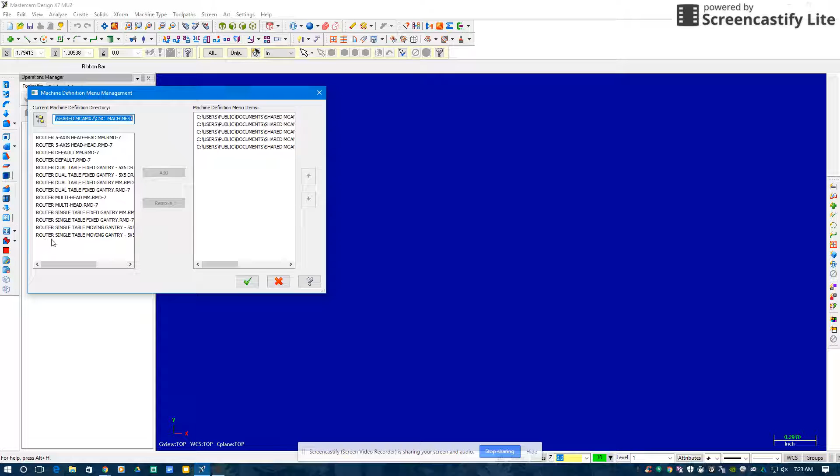Okay, first thing I do is I open up Mastercam X7. When I have it open, I go up here to Machine Type, Router, then I go to Manage List, and I go down here to Techno Servo, and I pull it over and add it here. Then when I'm done doing that, it should be on there.

So this needs to say Router, Techno Servo. I click here to Property Manager, Stock Setup. I put my arrow in the lower left-hand corner on the top of the board, and then I put my dimensions of my board in here. So in the X direction, I'm 14.5. In the Y direction, I'm 11. 3/4 thick.

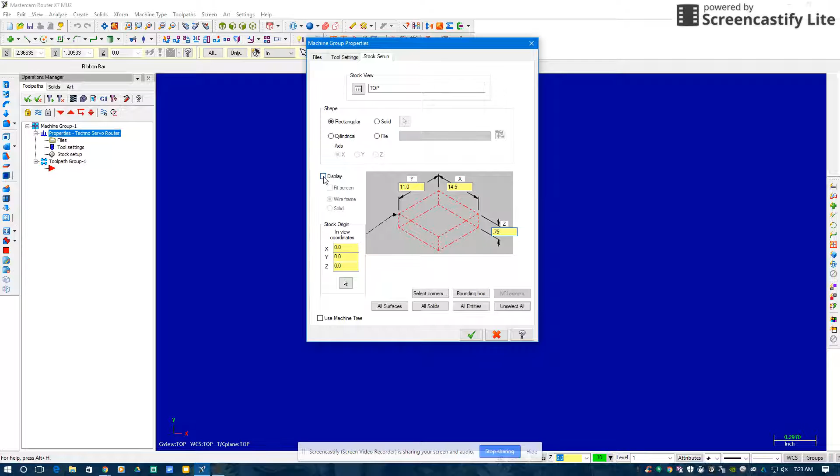If I want to see where that is, I click Display, then green check mark. F9 on my keyboard fits it to screen.

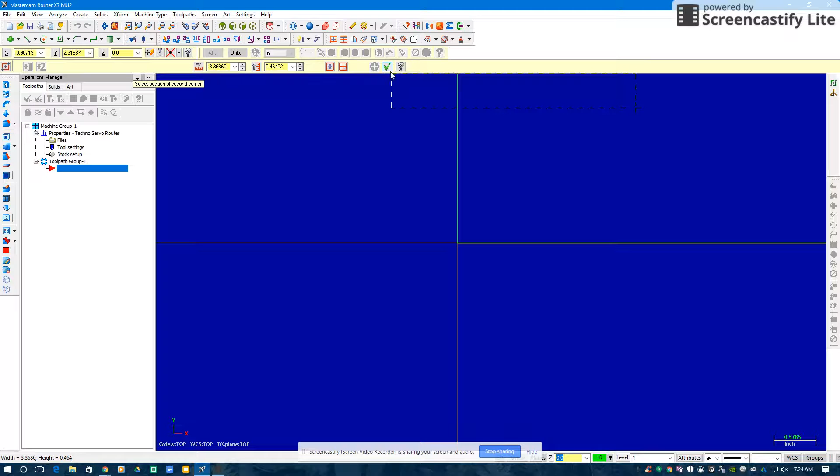From there I'm going to go Create a Rectangle. I click at the origin, I draw into the first quadrant, and I'm going to go over the same dimensions that I entered, so over 14.5. I'm going to go up 11, and I click in the first quadrant, green check mark, I'm done. This little thing fits it to screen.

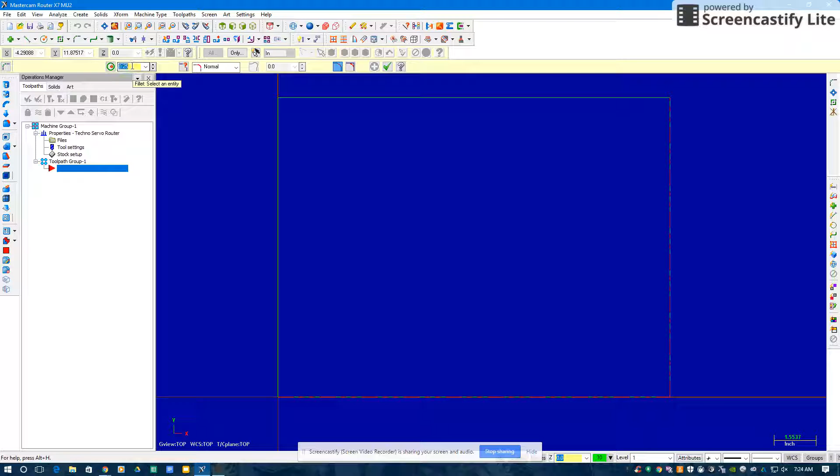Next thing I do is fillet the corners. I need to keep track of what the tape was or whatever I used to draw that radius. I have a 2-inch radius, so this right here is a fillet. I'm going to set that radius to 2 inches. I click here and here, here, so all of them are filleted. Green check mark, I'm done the operation.

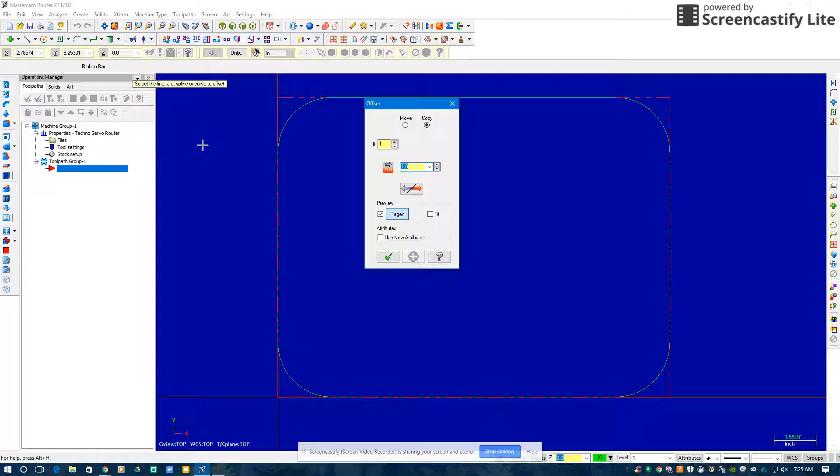Now I'm going to go X-form offset, and I'm going to use a 1/4-inch ball end mill to cut my blood groove, and I think offset 1 inch. You can bring it in however much you want, but remember you're going to go down the center line. So 1 inch is good.

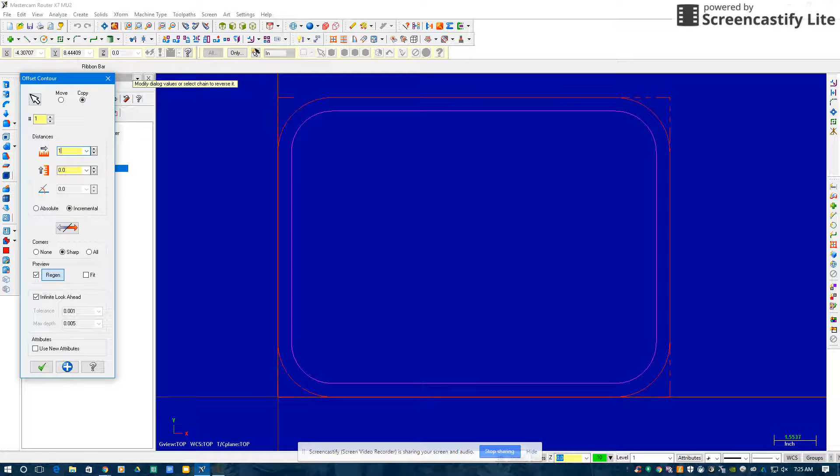I'm going to go X-form, offset contour. I'm going to select a chain. I'm done selecting, and I'm going to offset it 1 inch, and it's going to be a copy. So this is going to be my blood groove. If I'm going to have a hole cut in it, it's going to look a little different. Okay, this just makes my colors more clear.

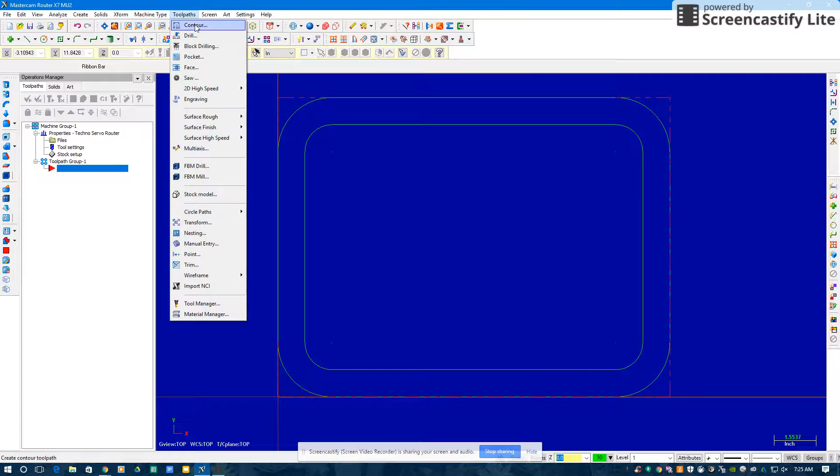Now my geometry is fully created, and now I'm going to run a toolpath on there. So I go toolpath, contour, green check mark. This is a chain, I'm going to chain it all the way around, green check mark. The tool I'm going to use, I come down here to tool library. It's going to be a 1/4-inch ball end mill.

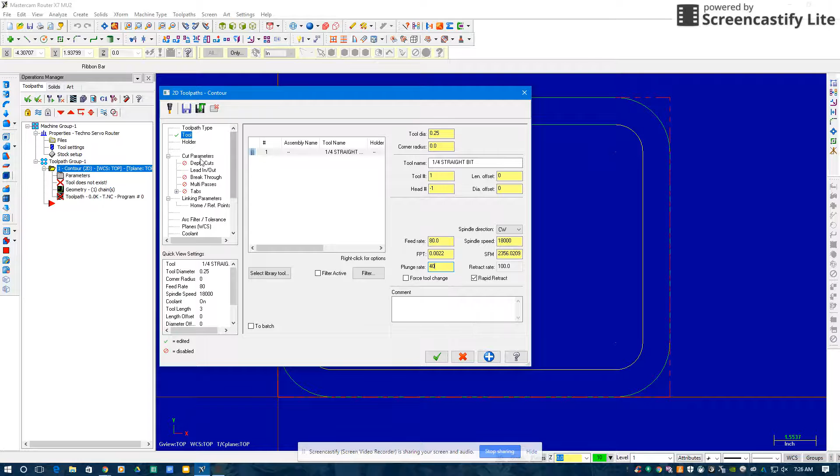I'm going to set this feed rate at 80 and this plunge rate at 40. Work my way down here, holder, cut parameters. I'm going to take the compensation type and turn it off. Depth of cut, I always select this. Lead in, lead out, I'm going to deselect that. Breakthrough, multi-passes, tabs, linking parameters.

These are all absolute, and this is how deep you want that cutter to go in here, so it's a negative value. I'm going to go negative 0.15. Blue plus holds the setting, and then green check mark. And now I've toolpathed that.

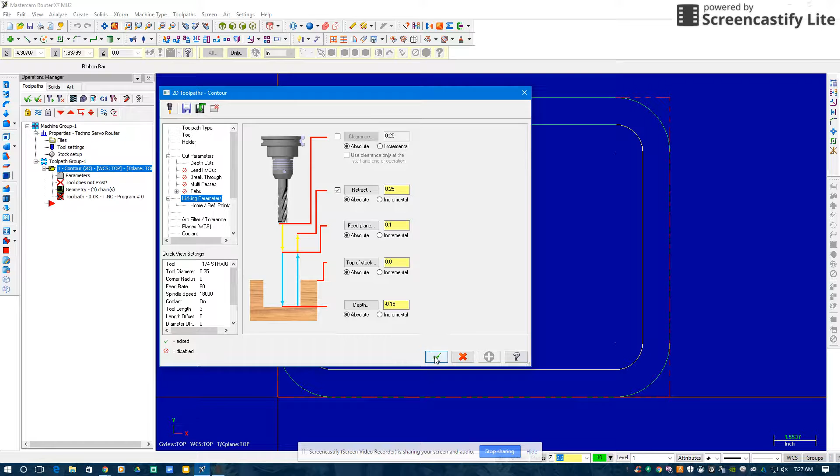I want to see what it's going to look like. This is a verify option. I can watch it in isometric. I play the video, and that's what I want it to look like. So there's my blood groove. I'm all done doing this.

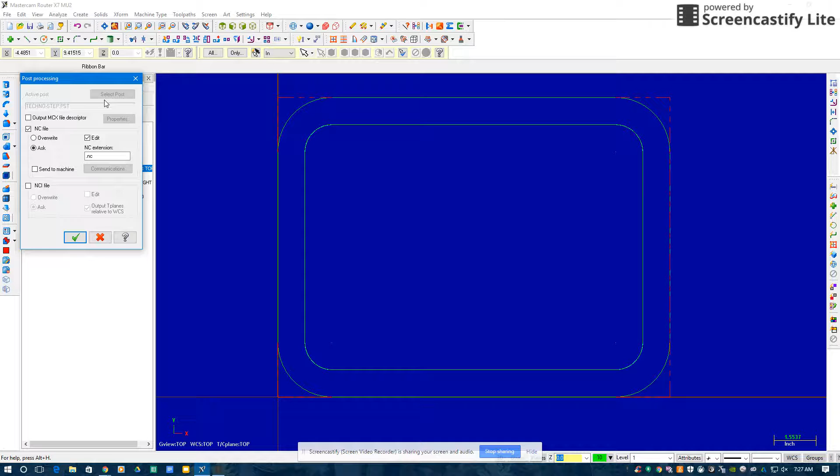Now what I'm going to do is go to G1, which converts this into numeric code. So I go G1, select post, and this is going to create an NC file. I'm going to call this JS bread 145. Okay, it's going to be an NC file. You have to save this on a flash drive because there's no internet in the shop, so you got to put it on a flash drive and then take the flash drive out there. So I'm going to hit save.

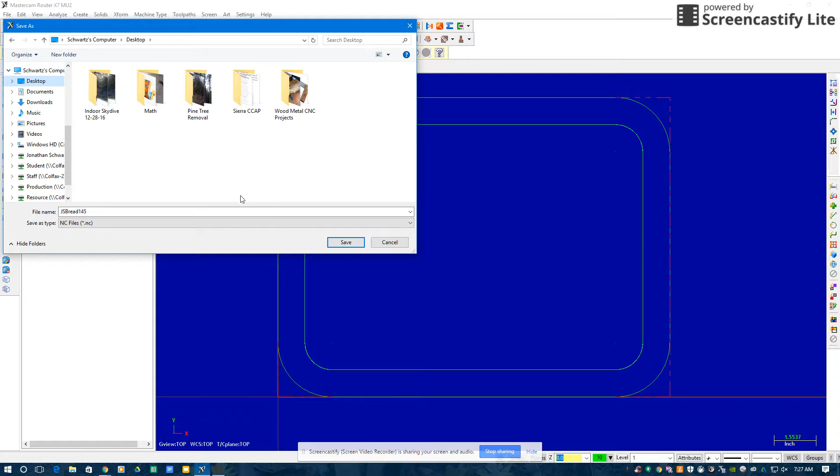Now I've programmed the CNC router to go ahead and run the blood groove in my bit. It's a pretty simple program, it's 20 lines of code. Okay, so that's how we're going to do our blood groove in our breadboard, and I'll show you how to fixture it down.